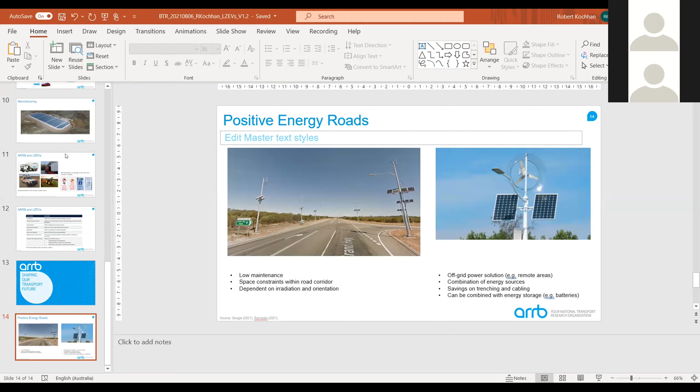Yes, we can see your screen. That's good. Let's start from the beginning. Okay, can you all see that? Yes, we can see that. Wonderful, thank you.

So I'm talking a bit about general background, what I've been working on, what we can work on as ARRB, what we have experienced in regards to low and zero emission vehicles or transport. This is a general overview, which gives you some ideas about what we need to look at when we talk about low and zero emission vehicles in general.

First, I want to start with the emissions created in Australia from different sectors. A large part of that is transport, shown in the middle brown column, and secondly electricity generation and distribution on the left, which is about a third of all emissions created in Australia. These two together play a large role in our overall emissions, and this is what we can tackle when we try to reduce emissions in the transport sector.

Of course, by using different types of vehicles with cleaner technologies, electric vehicles and hybrid vehicles, and also generating our electricity a bit less carbon intensive than we do at the moment.

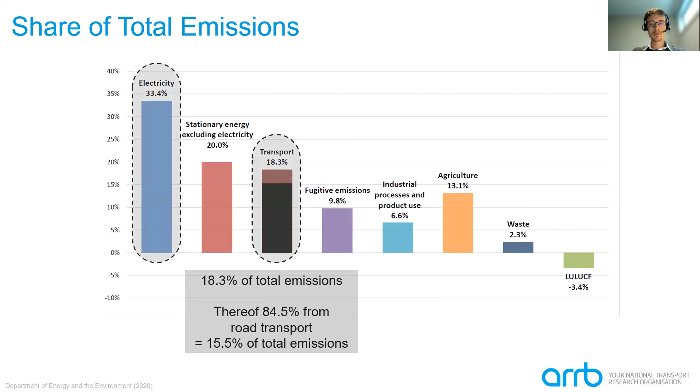If you look into greater detail in the transport sector, about 85% of all these transport emissions are created from road transport, and this is what ARRB focuses on for most of our work. The rest is rail, vessels, ships, airplanes, and so on, but most is from road transport, from the heavy vehicles and light vehicles we drive.

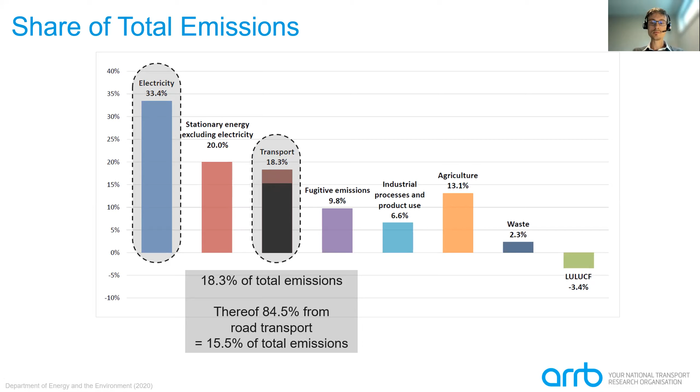In order to reduce these emissions, we can look at low and zero emission vehicles.

I've pulled up a figure from the International Energy Agency about the global electric vehicle outlook. We can see about 10 years ago, 2010-2011, we had next to no electric vehicles at all, and this has grown in the past 10 years to more than 7 million in 2019, possibly much higher already today, with an exponential increase.

Over the years, most of these vehicles are not in Australia, but in China, Europe, and the United States. Partly because Australia has a very small population compared to these other regions, but also because Australia doesn't have a lot of policy support for electric vehicle uptake. So we don't get enough vehicles for sale here in Australia at the moment, which has also contributed to that.

Just to note, BEV is the term for battery electric vehicle, so vehicles that only drive on electricity and can be recharged from a charging station or power point. PHEVs are plug-in hybrid electric vehicles, vehicles which have both a battery and usually a petrol engine, and can drive on either fossil fuels, petrol, or electricity.

In the next few slides, I want to go into the different options we have to look at in terms of energy and emissions reduction. These include both the use phase of the vehicle, when we drive it on the road, but also the phase where we assemble the vehicle and manufacture its parts.

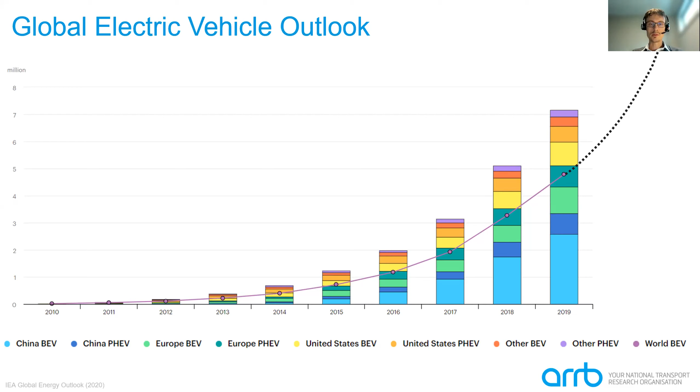That also contributes to the overall life cycle emissions of those vehicles. But before I go to that point, we need to, for the use phase, look again at the energy that we use to drive our cars with.

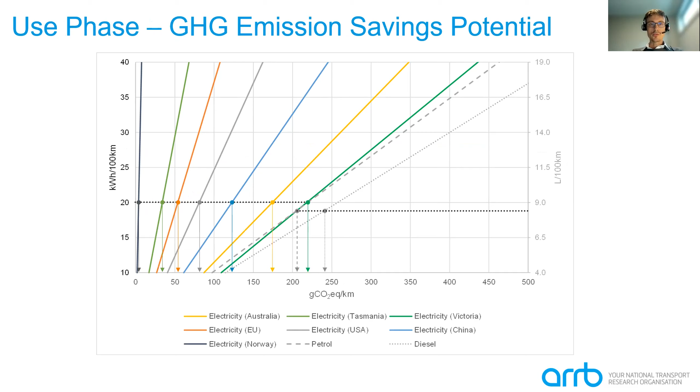So that was regarding the use phase when we drive the cars here in Australia. Of course, we also need to look at when we assemble and manufacture these cars and their components, because that also contributes to the life cycle emissions of these vehicles.

This is a generic overview of tracking the life cycle greenhouse gas emissions over the use phase of a car. Initially, when you compare battery electric vehicles to current fossil fuel driven vehicles, there is usually a higher amount of emissions generated during manufacturing, mainly because of new components such as the battery.

Over the life cycle of the car, as you use it and charge it with clean energy, you get out of that negative area in terms of this benefit for greenhouse gas emissions, and start saving emissions until you cross the zero line, and emissions become less eventually, after many tens of thousands of kilometers down the road.

There are different lines here for a battery electric vehicle with a small battery on a 200 kilometer range, or a larger battery, or even a hybrid electric vehicle, which has both a petrol engine and a battery in it.

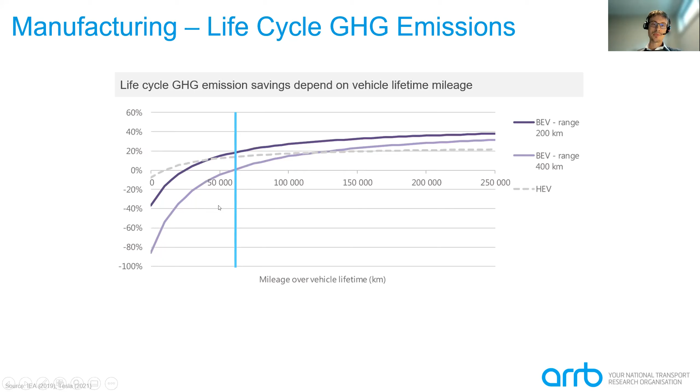The other thing I should mention is that if you have a private car, you may reach 50,000 kilometers only after 3 or 4 years of owning it, which means it takes a very long time to offset the initial disbenefit in terms of life cycle greenhouse gas emissions.

However, if you have fleet vehicles, such as a taxi or delivery vans, they drive a lot of kilometers every year, and you might reach that 50,000 kilometers after only half a year or so. This means it makes a lot of sense, for electric vehicles in general, to look at use cases with a high utilization rate, which allow us to really make use of the benefit of the electric vehicle creating less emissions during the use phase.

This is an indicator that the graph I showed earlier, where we start in negative territory in terms of emissions, is coming closer to the zero line in the future as we use more renewable energy to manufacture electric vehicles than we did in the past. Also, we scale up production, which makes it more efficient and less energy intensive per unit, per car or per battery.

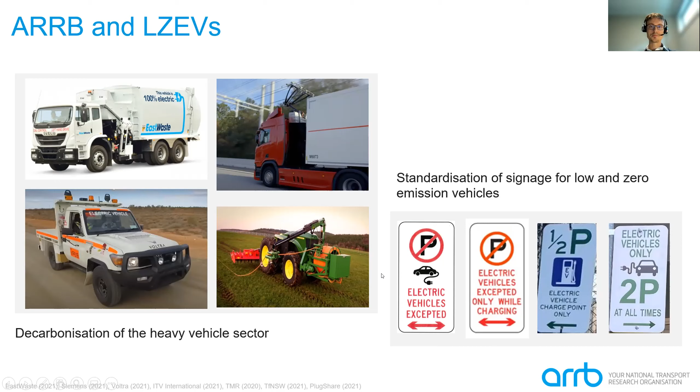Another project we were involved in is environmental impact parameter values. It's a bit of a different project looking at costs that result from road transport, from vehicles that we drive on our roads due to the fact that they create emissions, here in the greenhouse gas emissions categories. But there are also negative impacts in terms of costs for air pollution, noise pollution, and a lot of other things that we can quantify, to estimate the actual impact of our road transport in terms of emissions and costs.

Yeah, I think that's it from me. I'm happy to answer questions regarding all of that. Yes, we can go to the next person.

Thank you, Robert. It was very interesting for me, even though I'm at ARRB, but ARRB is really big. We have over 200 staff and different strategic working groups.

So it was even very informative for myself about what we are doing. There are actually two questions in the chat box from Professor Karl Kochhan, and I can read the questions, but Karl, please feel free to unmute yourself and ask directly if you want. But I can start reading the first one.

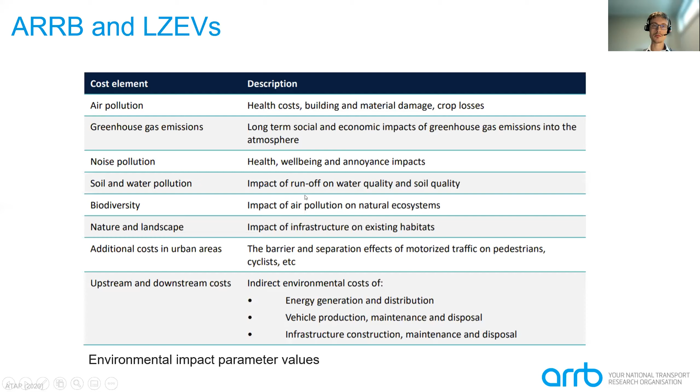Of course, there might be some variations as we progress. These figures are a few years old already, so Australia might have come down a little bit. But on average, if you look globally from the view of developed nations worldwide, Australia still has a very high share of fossil fuels in electricity generation—coal, oil, and gas. So we're not as good as the average of the EU or US, for example.

It's very interesting. So, for instance, even if we have a battery car, we think we are really on the green side, but still, because the electricity feedstock is not 100% renewable—sure, but even if you look at the relatively dirty energy we have in Australia, we still are able to save emissions from electric cars. And if you manage to reduce that in the future, or if you're a private car owner who plugs your car into your house which has solar on the roof, then you essentially don't create any emissions at all. It depends very much on the use case that you have.

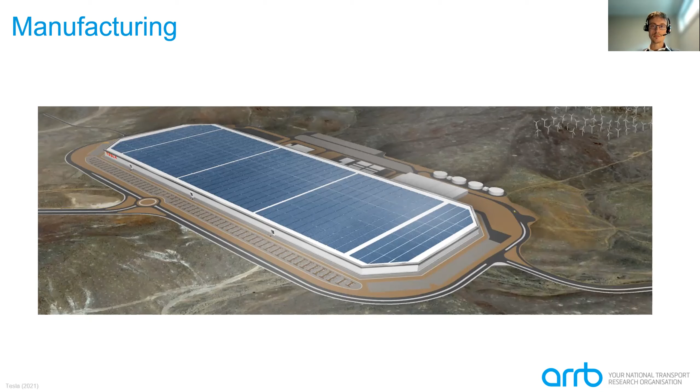So as we move towards a cleaner energy mix in general, and towards something like what's shown here, where entire factories are powered by renewable energy, these emissions per unit or per car come down a lot in the future. So what we're looking at here in terms of negative territory at the beginning of the vehicle's life is coming closer towards the zero line in the future, I guess. That's why I think we need to update some of the assumptions made in previous studies and publications around the manufacturing emissions of the vehicles.

Kendall, okay, he's happy and he thanks you. Okay, so if there's no more questions, then...

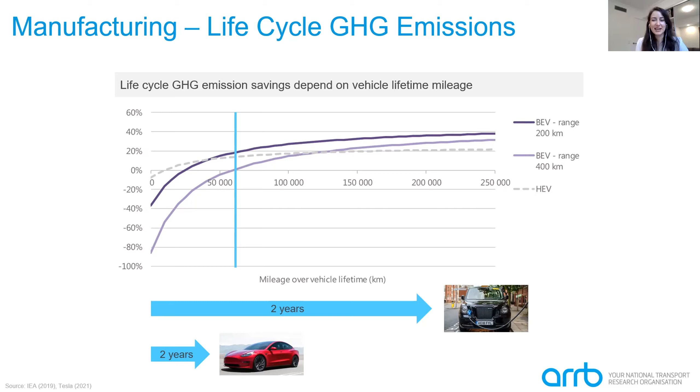Actually, I forgot to introduce you, Robert. Yeah, that's fine, do you want to do that? I can do it myself as well. Yes, let me just introduce Robert after he presented. I'm so sorry, I was between meetings and after that keynote speaker, I was kind of in a rush.

Dr. Robert Kochhan is a qualified engineer and also an economist, and the Transport Future Portfolio Leader at Australian Road Research Board. He has extensive knowledge and international experience working on battery electric vehicles and related future transport systems, as you also observed in this presentation. He has previously worked on future urban transportation projects and sustainable mobility solutions in Singapore and Germany, and has also been involved in solar electric vehicle design and development in the context of the Australian World Solar Challenge, where he participated as a member of a Brisbane-based solar car team. So he's our electric battery champion at Australian Road Research Board.

Let's say. Okay, thank you Robert for your presentation. No problems.

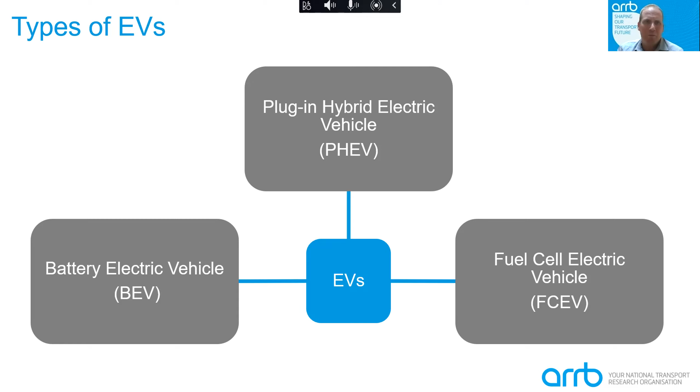As a side note, it's noted that hybrid vehicles with no plug-in features are excluded from the study. It's also noted that the definition of EVs is an evolving space. In the recent UK ban on internal combustion engines, coming into effect by 2035, this would also include PHEVs, the plug-in hybrid electric vehicles. In that instance, EVs are those vehicles which are purely EVs only and do not have an internal combustion engine at all. But for our project, we recognised those three categories as being the EVs.

So as a high-level overview, the project found that in order to support the transition to EVs, there would be actions that span across road operators' core and non-core functions. The core function relates to an area that road operators currently manage or are responsible for, and which requires different actions for EVs than for conventional vehicles.

A non-core function relates to an area that the road operator may not need to, but could act on to support the transition to EVs, either by removing barriers or providing active support, based on stakeholder expectations, other road operator examples, or taking a leadership position.

So as road operators undertake more actions associated with the non-core functions to support the transition to EVs, this is expected to increase the support in EVs as shown, and then this could result in an increasing uptake of EVs in the community.

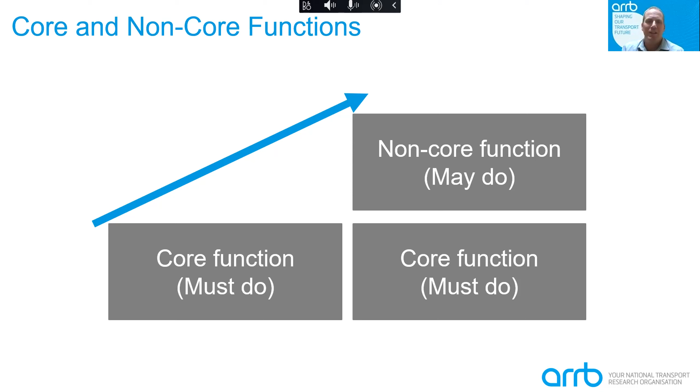Essentially through the investigation, 11 core issues were identified. These are issues that road operators must address in order to support the transition to EVs, because EVs are different to internal combustion engine vehicles and will have an impact on how road operators manage their road networks.

Of those 11 core issues, 4 were associated with registration and licensing. This includes inconsistencies in the classifications of EVs, considering expanding NEVDIS, which is an Australian concept for registering EVs across the Australian network to capture EV data, considering a unique identifier for electric and hydrogen vehicles, and investigating any license and mass concessions for light electric trucks.

And then 2 are associated with road access, including assessing hydrogen vehicle safety and access, and investigating payload concessions of electric heavy vehicles.

And then 5 were associated with EV charging infrastructure. This does not include the deployment of EV charger infrastructure, as that comes under the non-core ones, but essentially includes reviewing charging infrastructure public interactions, considering plugless charging and how that might evolve and impact on road management, reviewing service station standards, reviewing signage standards and guidelines for EV chargers, and considering sharing EV charger data to help plan for EV charger deployments and understand how much it's being used out on the road network.

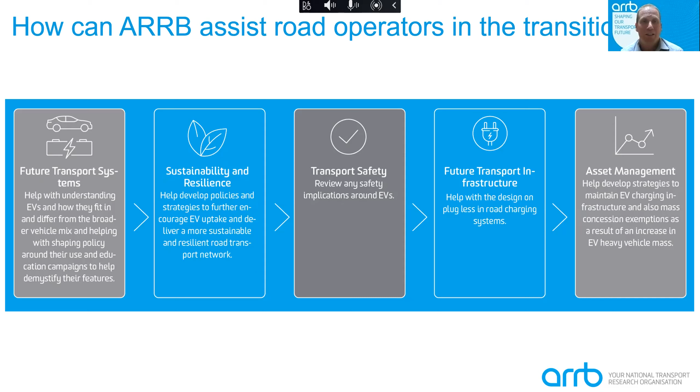I'm sure there are other aspects we can help with, but those are some of the key ones that immediately come to mind. Yeah, so that's essentially the end of my presentation today on this topic. Happy to take any questions or move on to the next one. Thanks.

Thank you, David. Is there any question? I don't see any question in the chat box. But yeah, like...

From what you presented, it's definitely very useful for the next presentation, which is actually mine, about hydrogen fuel cell vehicles. I believe we can adopt the same kind of strategy for the next one.

No worries. Okay. Okay, Kendall has a question.

Is plug-in charging likely to be viable? Is it likely to be viable, or plugless charging, are you saying? Oh yes, plugless, sorry. Well, I guess it's probably too early to tell.

But I think it's definitely got potential to help address some of those issues associated with EVs and the need to charge, plug in, find a charging point. But obviously there's the issue around having that installed in the road, and answering that question about it being viable, etc. So I think it's really just early days, and that's what we highlighted in the report.

So you can see now my screen, right? Yes. Thank you. Okay, let me just... sorry, I have too many slide decks. Actually, I can't see my...

Okay, yep, here you go. Now I can see that.

So I'm going to talk about hydrogen fuel cell heavy vehicles. It's not an externally funded project, but research we started studying here at ARRB since last year when I joined. It's one of the research agendas now at Australian Road Research Board. It's more about the literature review, but also our recommendations for some project opportunities that might be emerging.

So, hydrogen as a fuel. Hydrogen can be used as a fuel in transport, where fuel cell vehicles convert the hydrogen stored in cylinders, which you can see here in the vehicle, to electricity, using oxygen from the air in the fuel cell tank. The produced electricity is then used to drive an electric motor, shown here in this picture, and to recharge the electric battery.

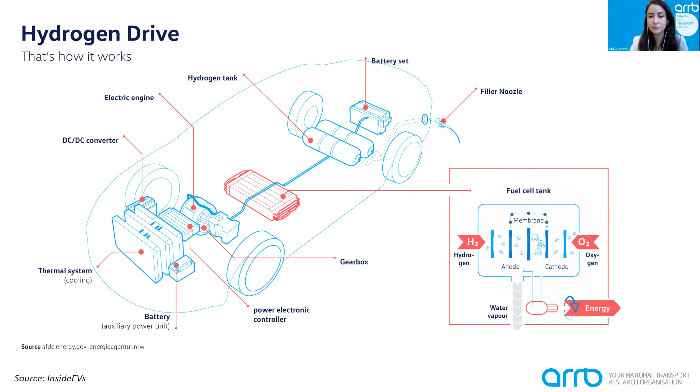But why FCV? Some argue that now that we have battery electric vehicles, hydrogen is more of a distraction. Battery electric vehicles exist as an option in competition with fuel cell vehicles. However, battery electric vehicles have limited operational capability in terms of heavy vehicles, including a lower distance range traveled and much higher recharging time, excessive size and weight of the battery, which reduces payload efficiency, and a higher material footprint due to the use of lithium batteries.

We know that in terms of heavy vehicles, particularly trucks, idling time is a very critical factor. So for recharging a truck that may take 7 or 8 hours, it might not be very ideal. And also the distance range with one time of charging is a factor.

The estimations indicate that refueling time of a heavy-duty fuel cell vehicle is about 3 to 8 minutes for regional delivery and 10 to 20 minutes for long-haul trips. This is based on a Department of Energy USA study from 2019. Whereas recharging time for the same size battery electric vehicle is estimated to be 8 hours, which requires idling the truck and allocating a designated charging area.

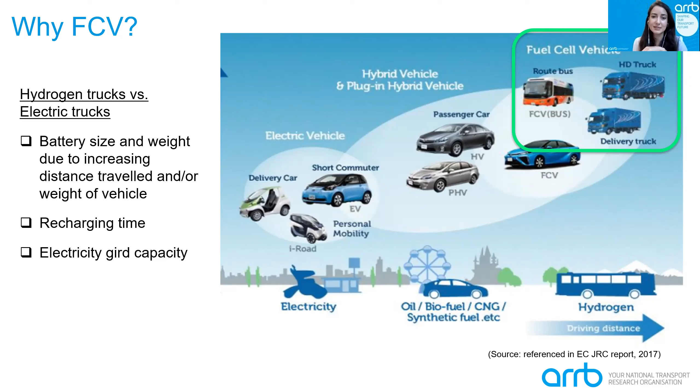EVs are efficient and cost-effective for lighter vehicles traveling relatively short distances. But when we go to higher distance of travel, or weight and power required, it really increases the battery size and weight, and in addition, as I said, it takes recharging time. So that's where the fuel cell heavy vehicle application could be useful.

The viability of hydrogen trucks has already been tested and established in a number of international markets. You can see here a few ports leading hydrogen trials, and also a few truck trials. There are actually heaps of them out there in China, Japan, and Europe. I've just mentioned a few of them.

However, it is yet to take hold in Australia. We don't have any hydrogen trial in heavy vehicles. We've recently heard some news that there are going to be 2 hydrogen fuel cell trucks in Port Kembla, New South Wales, and also 1 hydrogen bus in Perth for one of the mining companies, but we don't have any living testbed or trial yet in Australia.

So globally, the hydrogen economy is forecast to reach 155 billion in 2022, and many countries are investing in this technology's future potential as a fuel, energy store, and feedstock. In Australia, CSIRO estimates a potential for a $1.7 billion export industry and significant growth in domestic end user demand market by 2030.

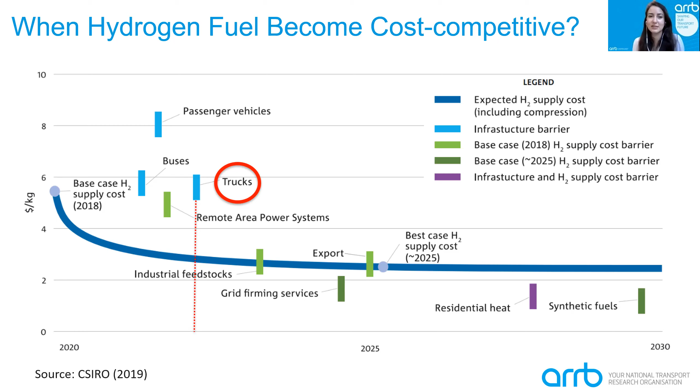So the reduction comes actually from the lower cost of hydrogen production, 30%, and 70% from the lower cost of retail distribution, driven by increasing station size and utilization.

So as the heavy-duty fuel cell vehicles reach the market, the freight transport industry needs information on the benefits, challenges, risk, and cost of ownership of these vehicles. Currently, these decisions must be made with little long-term field test history. There are just a few trials, as I mentioned, but not in Australia. And in general, fuel cell vehicles lack significant historical operational, maintenance, and cost data that would typically support investment decisions in transitioning the fleets.

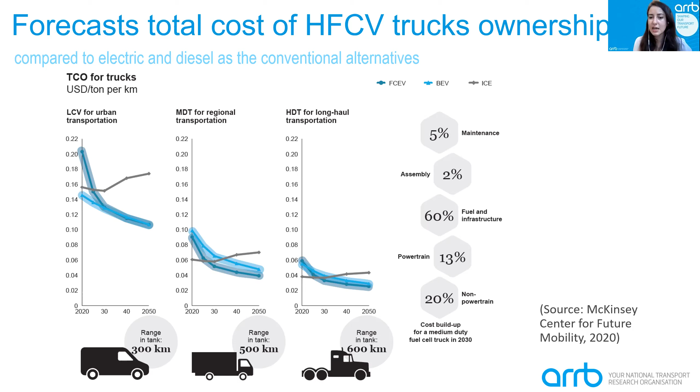So there exist a few unanswered questions and concerns regarding heavy vehicle fuel cell vehicles' effectiveness. For instance, what would be the effective distance range, reliability, fuel stability, and so on and so forth.

And regarding the reduction in price, hydrogen refueling infrastructure is the key enabler of this technology, but it's just like a chicken and egg problem. So how can we actually unlock decarbonization of heavy vehicles? It's an interconnection between supply and demand. The uptake of heavy-duty fuel cell vehicles is facilitated by easy access to the infrastructure and affordability of hydrogen fuel at the pump, where diesel and gasoline powered heavy vehicles take advantage of in-place fueling infrastructure. The lack of infrastructure on hydrogen might be a barrier.

So for instance, in Queensland, current hydrogen production occurs at industrial sites where gas, so-called blue hydrogen, or electricity, so-called green hydrogen, is used. Regarding a network of hydrogen refueling stations on the public road network, hydrogen should either be transported via trailer in a compressed or liquid form, or via existing gas pipeline. Actually, one of the advantages of hydrogen is that we can utilize the skills and also the existing gas pipeline to transport the hydrogen, and even the existing gas pump stations.

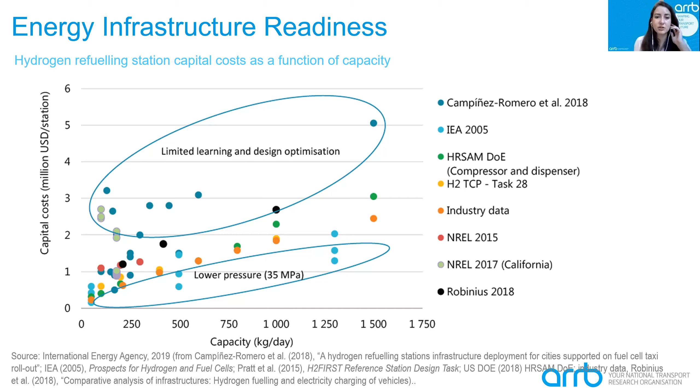Regarding hydrogen refueling stations, it has been advised by several organizations, for instance the European Commission or the Australian Trucking Association, that public financial support should be used to trigger significant private investments for these refueling stations. Here you can see the capital cost based on the capacity of these refueling stations, based on different trials that have been in place around the world.

When I mention unlocking decarbonization of the heavy vehicle transport sector, in terms of light vehicles and passenger cars, it's very easy to talk about, and with the policies and everything, because the market and model availabilities exist, it's really easy to move towards decarbonization by the targets.

But when we are talking about the heavy vehicle sector, we don't have any electric trucks. I mean, there are some electric truck trials, but they're not very common. So where the size and dimension of demand are unclear due to a lack of economies of scale and scope, the supply price of fleets and hydrogen fuel will also be much higher than diesel trucks.

On the other hand, the demand for hydrogen in the transport and logistics industry is overwhelmed by the lack of infrastructure, lack of calibrated total cost of ownership within the local context, for instance here in Australia and so many other countries, and also the higher price of hydrogen fuel on the supply side.

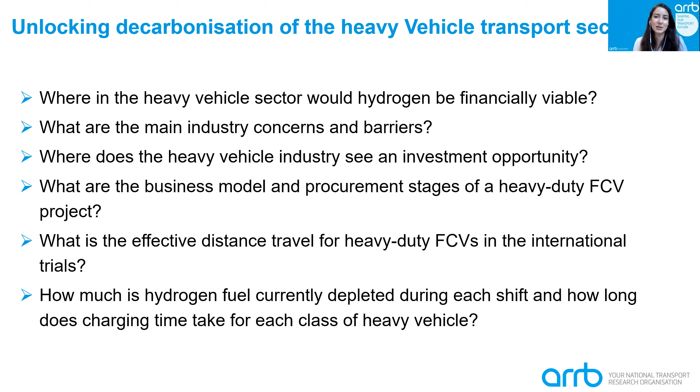With that, I've finished. Please contact me - here's my email address, and I'm happy to take any question.

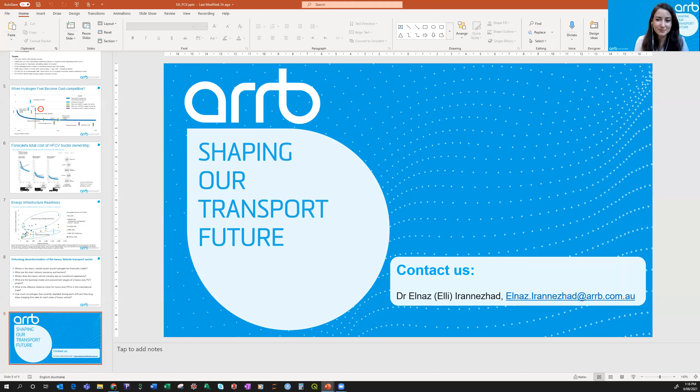So Elli, I raised my hand, my little virtual hand.

I hear from my friends in the energy sector that really the only way for the foreseeable future to get hydrogen is to use curtailed, or spilled, or excess renewables. Otherwise it's just way too expensive and it's not carbon saving. So is that how you think Australia will be doing it?

Yes, that's correct. We believe that kind of a transition should happen, so even with some gas resources that we have, we don't think we necessarily should now encourage everyone to use green hydrogen as a feedstock, because of the price - as you mentioned, it's not cost competitive. But if we just wait and see if it's going to be cost competitive in the next 5 or 10 years, then we will lose that race for decarbonizing the heavy vehicle industry.

So it might even be good to start with blue hydrogen, or even gray hydrogen, and then move towards blue hydrogen and then green, rather than just waiting and doing nothing, because at the moment the heavy vehicle sector is just dominated by diesel trucks.

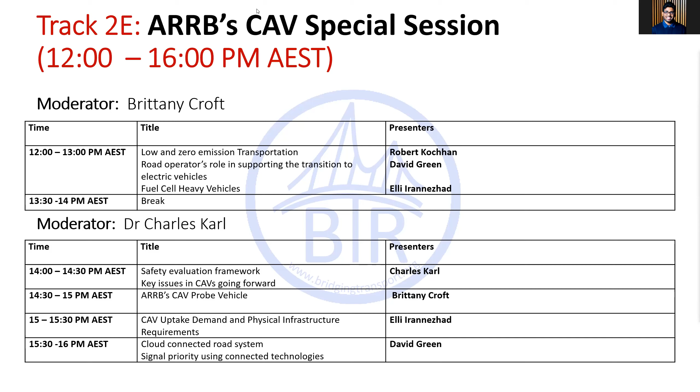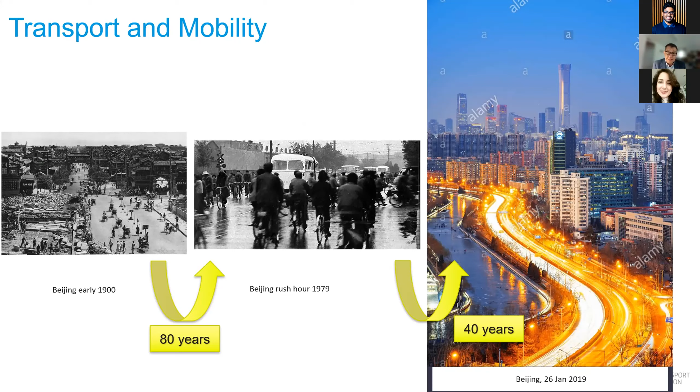In this first presentation, I managed to combine two presentations. The first, of course, is how is all of this going to operate safely? Because until we transition to cars with no steering wheels and so on, we are going to have an environment where we still have the horse and carriage in some of our cities, and we will have all the normal cars that people will drive - young people, old people - and we will have all of these wonderful e-scooters, e-bikes, and autonomous shuttles and so forth. So how is all of that going to work safely?

This timeline that I mapped - in fact, I think we are in that period now - because we have a very prescriptive regulatory and operational environment. Remember, all of you have got a driving license. And then if you buy a car, you've got to pay registration, and then your car can go on the road. Otherwise you'll be fined and the car will be towed away. So we have driver's licensing and you register your car. And then wherever you drive, even if you drive on a university campus, you have to follow the rules in the campus, or on a local street, or on the motorway and so on.

So it's very prescriptive. But when we talk about cars with no steering wheels and so on, autonomy and so on, we are transitioning. If you think of those operations today, how do they manage to operate? Well, the proponent goes to the road agencies or the government and says, 'Hey minister, can you give me an exemption?' And do you think the minister will just say yes based on that? No, he wants to see a lot of information, and then he will have his people study the case and say, okay, if you follow all of those things that you say you will do, then I will let you operate on my university campus, or on my high street, or on my motorways.

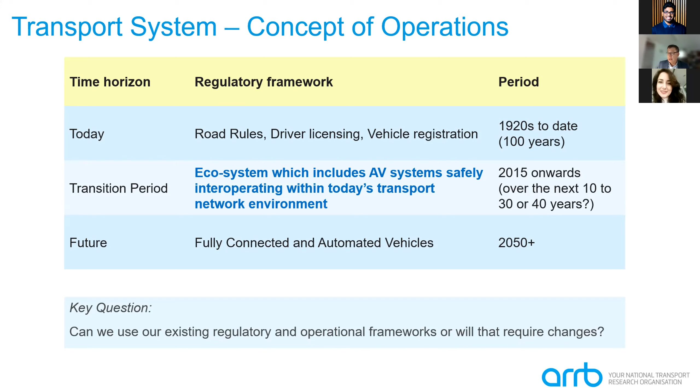The most important thing to remember is that we can have vehicles coming from all over the world, but in order for it to work in our jurisdiction, it depends very much on the infrastructure we have. Like hydrogen vehicles and electric vehicles - no infrastructure, how can you operate? The other part is about people. People need to understand how to work with the technology and the infrastructure, not just the owners of those vehicles, but all the other network users - the pedestrians, the cyclists, the trucks and the cars and the buses.

And the fourth part of the system is our regulation and our operational frameworks. You can think of laws like the ones for lockdowns and COVID, but to actually operate them successfully, there's a lot of non-compliance, and people with language difficulties don't understand and cannot do those things. So you can come up with laws, but if you don't have those operational frameworks in place, it doesn't work. The best laws cannot work. So when we talk about a transport system, those four elements really have to work together. And what works in another country, we can import 80%, but the remaining 20% is where we need to customize for local people, local environments.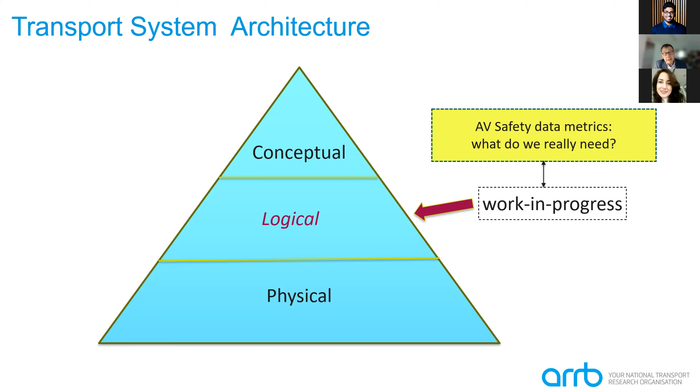We haven't worked it out yet. We are beginning to, in the exemptions that jurisdictions are providing, but we are on that journey.

Now, I like to use this example from Singapore because if you look at the boxes that I have not colored, those are the things that come from the vendors and the vehicle. So the vehicle comes in with a system safety, an active system safety, and a safety of the intended function - SOTIF. Those are ISO standards, and the vehicle and vendor have tested them out. But the thing they haven't done is basically validate that in the local environment, be it George Street in Sydney or Bourke Street in Melbourne or any other road in your jurisdiction. Of course it works on the test track, and it works in the countries where those manufacturers originate from. But will it work in our environments? We don't know.

And the other circle that I drew around was Singapore. Our colleagues in Singapore said, will it work in the Singapore environment? And where will it work in Singapore? So those are the things really that ARRB is interested in, and all of us would be interested in, because I guess we are not manufacturing vehicles in Australia.

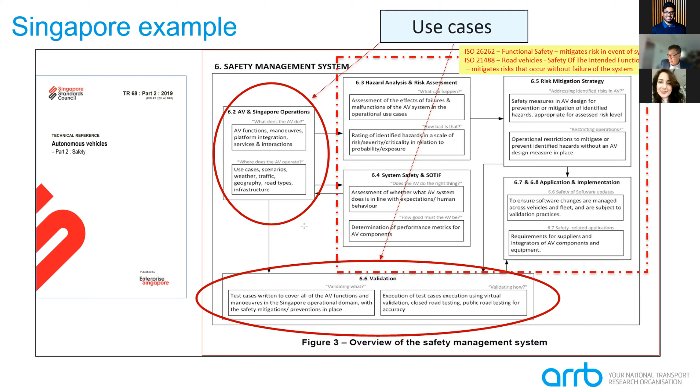But in order for those vehicles to work, for us to benefit from safety, from productivity, from emissions and so on, we need to be ready. So why have a safety management plan? It's because what we are trying to do is different from what we already have on the network. We have to think about this combination of technology, infrastructure and systems. How is this going to work? So organizations develop their idea about how it's going to work safely, and they present it to the jurisdictions, and the jurisdictions approve.

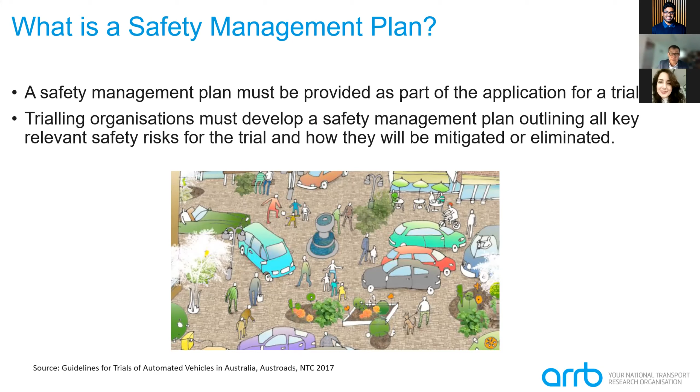What does this mean? What does this look like? This is my final slide. We have done many of these in Australia in order to stand up trials and demonstrations. At a high level, it talks about the project, the technology, how safety will be addressed, and what sort of traffic management plan will be in place - meaning we are going to close the road down and no one else is going to travel on it. So it's going to be very safe, Mr. Minister, we can operate it.

Or, we are going to operate it in peak flow traffic. How are we going to do that? Well, we're going to have an escort. We're going to tell all the drivers we're going to drop the speeds. Will that happen? And incident management. Then there are other approvals, of course, compliance, insurances, and so forth. And then all sorts of other information about who is actually going to be the driver and so on. So these elements at a very high level comprise the suite of documents that have been prepared and will be prepared.

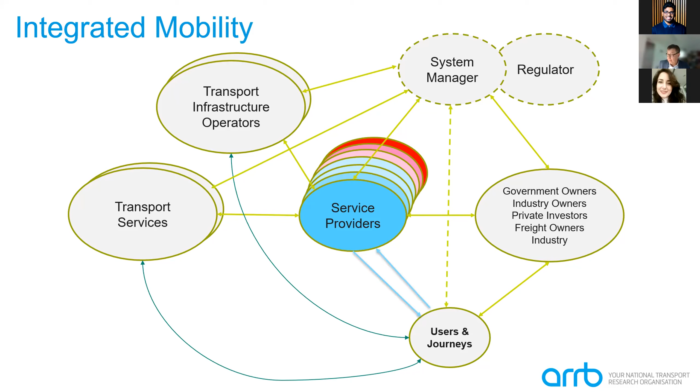Now, remember earlier I talked about the logical architecture, and when David presented in the earlier session, he talked about road operations—the things road operators should be concerned about when we have automated vehicles on the network. He talked about some of the core functions, the core areas road operators should be concerned about. This is something similar.

If you operate the network and you are going to this future environment, what are the core areas you need to be concerned about and have ready so that you can support these multiple service providers, with multiple vehicle options, with multiple infrastructure options? They are, of course: standards, interoperability, security, safety assessment, precise positioning, communications, the digitization of our traffic regulations, real-time management, and last but not least, a safety assurance regulator—just like in aviation, where you can operate all sorts of aircraft, but there is an assurance agency.

So I guess I'll close my presentation by saying, what areas do we have under development, and what are the missing links. So with who's in control in Australia, we talk about an entity being created in law called the Automated Driving System Entity.

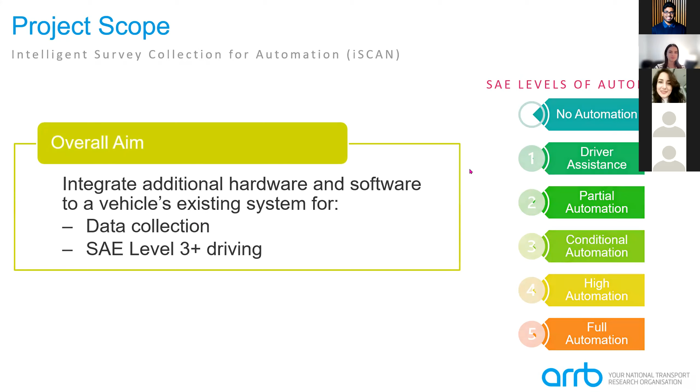This is kind of 3 stages - again, trying to make everything very basic to understand. While the 5 stages before were the official stages on paper for the first year, this is the project phases for the entire life of the car, starting with installing the extra technology all the way up to making it work to increase the car's automation. So once we've decided on the software and hardware, we're going to install it into the car and make sure it integrates with the car system and with each other.

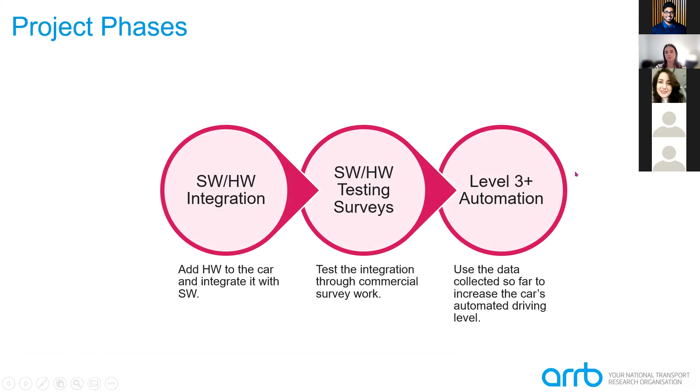Then after that we've obviously got to test. Because all of the equipment we're installing collects data, we're hoping that data can then, say, get commercial survey work and provide that data to clients like local governments, adding on to the fleet of survey vehicles that ARRB already has. Through doing all this testing and collecting all this data, we can then use that to increase the automation of the vehicle to get it to that level 3 and beyond.

The official objective is to establish a new automated probe vehicle as a test bed to enable applied research by ARRB into the deployment of CAVs in Australia by identifying different gaps. There's quite a few gaps already that we've identified, as you can see on the right-hand side, I won't read them all out. But through all the data we'll collect, and actually having a proper CAV running around that ARRB has access to, we're hoping we can find out not only the gaps in the vehicle market and the vehicle itself, but also the infrastructure.

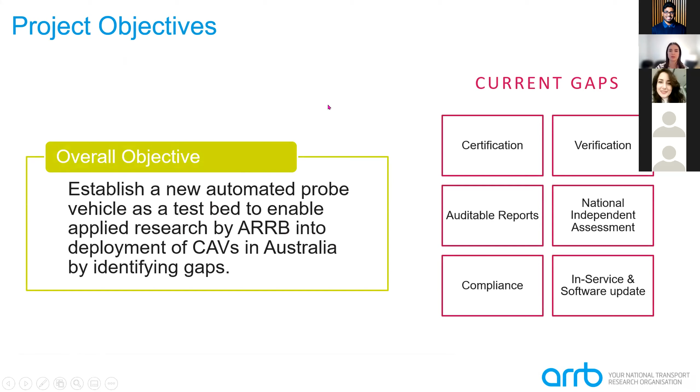That's going to be important because, as we know, a lot of the vehicles currently on the market with some form of automation level 1, 2, whatever, are made overseas. Australia is quite different, so we've got to make sure our infrastructure allows us to access some of the higher technology that overseas cars have, that sometimes we miss out on because our infrastructure is a little different.

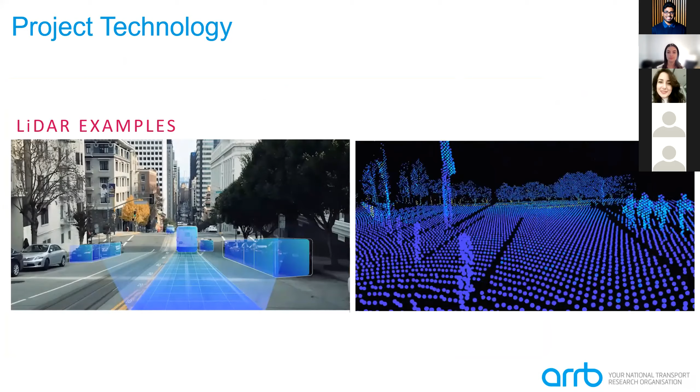And just finish the presentation with some more shots of what it would look like. So the finished product should look pretty much like this, but with some added gadgets on the side, LiDAR, radar, cameras, that sort of thing. So it'll be a bit chunkier, but hopefully look very similar to this.

Thank you, Brittany, for a very nice presentation. In fact, you're very lucky to have an A team here. Brittany, Francis, the initiative actually started by Dickson and Leow, who unfortunately left ARRB to start another exciting career. But anyhow, I hope the project keeps going.

We were cautious about not leaving too much information because that's an iMove project, and we are cautious that it has to be first announced by iMove and ARRB. It's actually an internally funded project, so we don't have an industry partner for this project. The industry partner is also ARRB, but with the help of iMove.

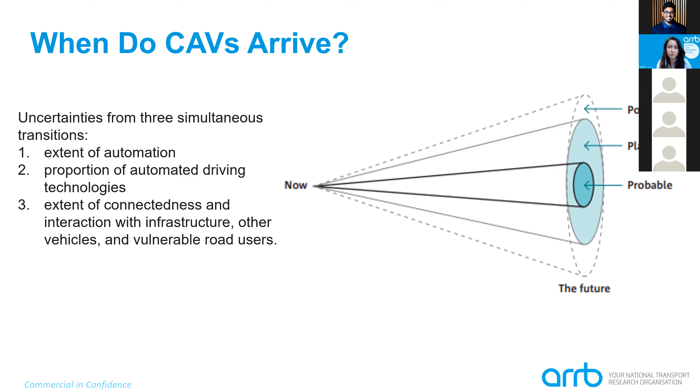Now, in the figure on the right hand side, you can see that I have indicated probable, possible, and plausible future. So the forecast that we did for the uptake demand is more on the plausible future, because of all of these uncertainties.

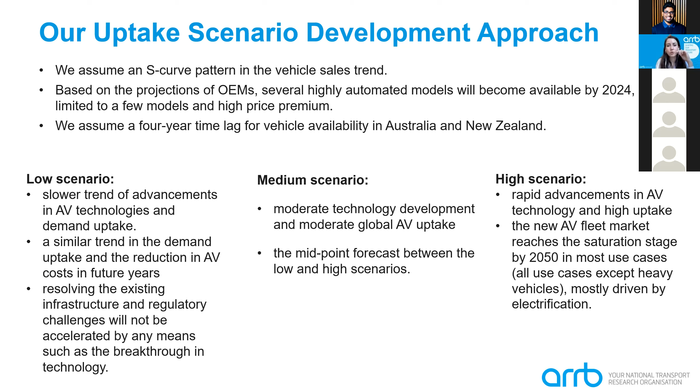In this way, when we have both low and high scenarios, we can undertake sensitivity tests. For example, if the uptake were very rapid, accelerated by electrification or interventions or a breakthrough in sensing technology, we would be able to see what that would mean for different investment and infrastructure requirements.

So the market expansion in terms of new vehicle sales is expected to continue significantly from 2030 onwards. The medium scenario assumes that passenger vehicles and robot taxis equipped with advanced driver support systems, like level 1 and level 2, have already hit the market.

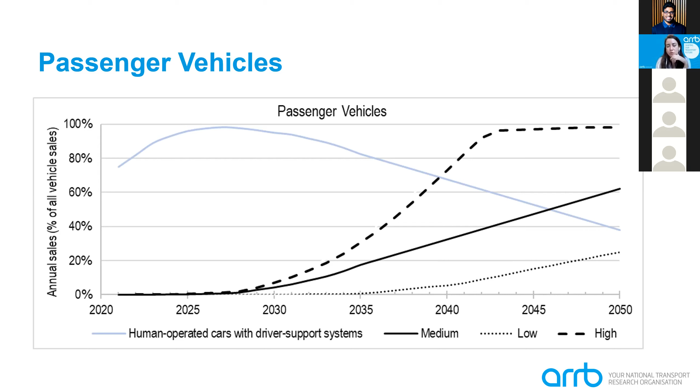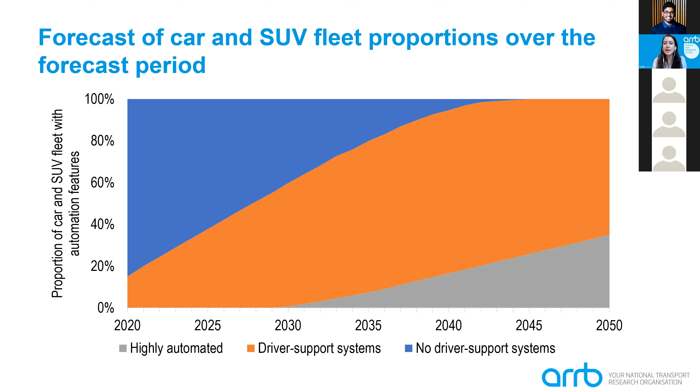This figure presents the plausible timeline of the market penetration of passenger vehicles. In the previous slide was the new sales, whereas this one is the market penetration. We forecast the market penetration based upon the new fleet sale rates presented in the previous slide, the annual market growth, which is a constant rate per capita based on ABS, Australian Bureau of Statistics forecast of low, medium, and high population growth, and an average lifetime of 10 years of passenger vehicles.

Based on the analysis of supporting evidence gathered from expert consultation, the Austroads reports, and historical motor vehicle sales, we expect that wide-scale availability of driver support systems, or so-called ADAS, level 1 and level 2, will occur sometime between 2025 and 2035. And the deployment of highly automated vehicles, level 3 plus, with a dominant share of level 4 vehicles, will occur between 2035 and 2050. So that's about the AV uptake demand.

I'm going to talk about infrastructure enablers, but I can answer some questions if you have.

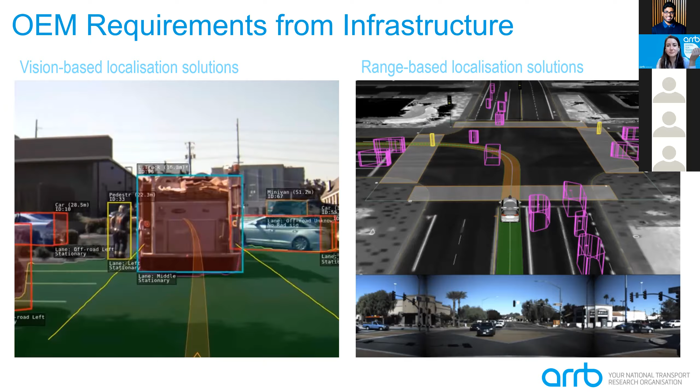The approach consisted of three processing methods: machine vision post-processing of road surveys, manual rating of road surveys as validation, and real-time processing to simulate CAV operation. They audited 25,000 kilometers using network survey vehicles, using existing and new video imagery, plus an additional 1,000 kilometers of priority roads using real-time data collection.

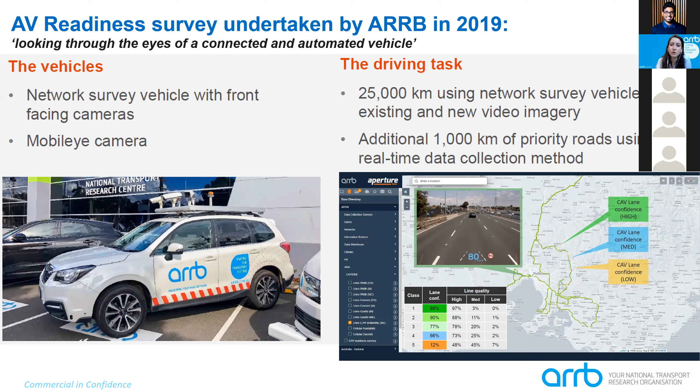The findings have been published in the report Infrastructure Changes to Support Automated Vehicles on Rural and Metropolitan Highways and Freeways, and it is publicly available for everyone to download and read. The major findings - I won't go through all of them here - but it looks like that in Australia, freeways and

highways typically are ready at least 90% of the time for the operation of at least level 2 automation. Cellular availability also is typically high, and it looks like the width of the line marking is likely to be less important than the overall contrast between the line and pavement.

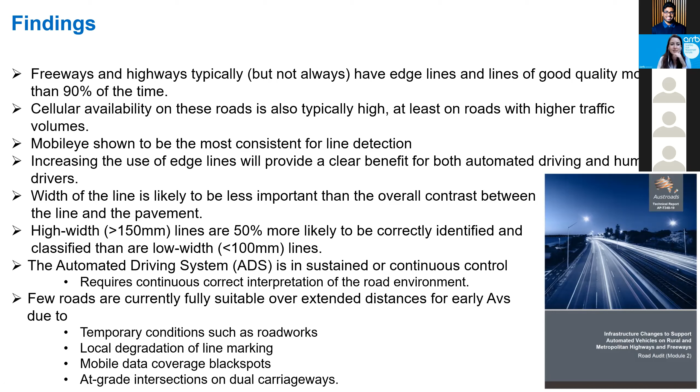This result is very interesting because there are other studies that focused on the line marking width, saying it should certainly be 150 millimeters, whereas it looks like the contrast ratio is far more important from the machine vision perspective.

That study really helped us in understanding the physical infrastructure requirements for CAVs. In the short term, we see that AV readable line marking, a harmonized approach of road signage, and work zone signage, and treating ghost line marking,

are important infrastructure requirements for the operation of CAVs on all road types. For motorways and highways, ramp line marking is confusing for automated vehicles. This is a finding of several trials and studies, and also the placement of the ramp and mainline signage

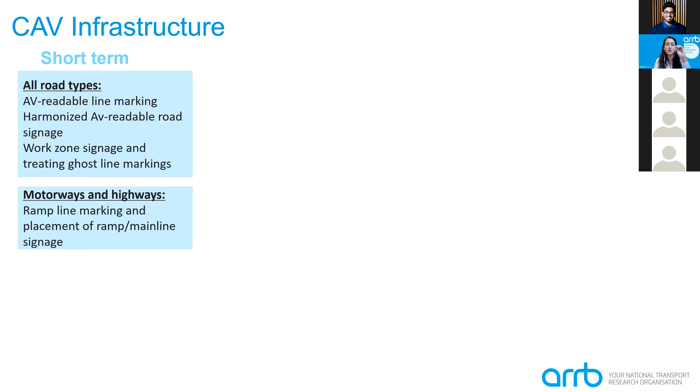is sometimes confusing for automated driving - they mistakenly read the sign installed on the ramp, not the main line, or the other way around. On urban arterial roads, we need to invest in CAV compatible traffic signals in terms of placement, and also in terms of the AV readability of the traffic lights.

When I say CAV compatible, it means having roadside units and connectivity to vehicles, because trials, one after another, show that when the placement of the traffic lights is blocked by other vehicles, trees, or something else, it would be a very risky situation for automated cars.

Also school zone signage, which has different standards across different states, is one of the other critical issues. In rural highways, however, because in Australia we have so many unsealed outback roads and rural highways, it looks like it's impossible to have pavement line marking, or even pavement in the first place, let

alone edge line marking on those. In that case, providing contrast ratio of the road surface would be important for AVs. These are the short-term infrastructure requirements.

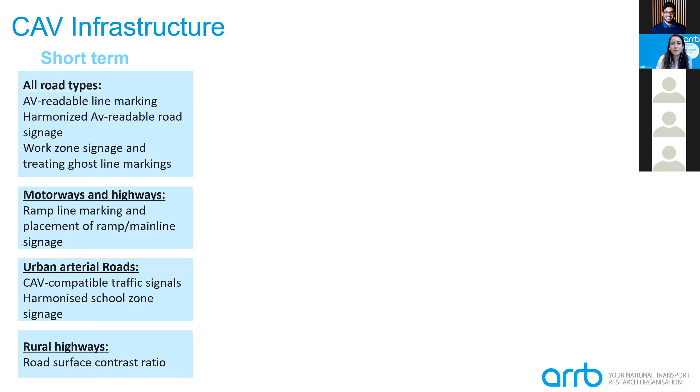In the short/medium term, we see that some new infrastructure would be required. For instance, safe stopping areas on motorways and highways, and managing transitional points between highways and arterial roads. We now have some abrupt transitions that are very challenging, so for automated driving technologies, there should be connectivity or proper signage installed in those transitional areas.

On urban arterial roads, we're going to need CAV pickup and delivery areas for robotaxis, for robo shuttles, and also for robo-commercial vehicles. Kerb and walkway management for footpath delivery vehicles is also another challenging area that has been found by several trials.

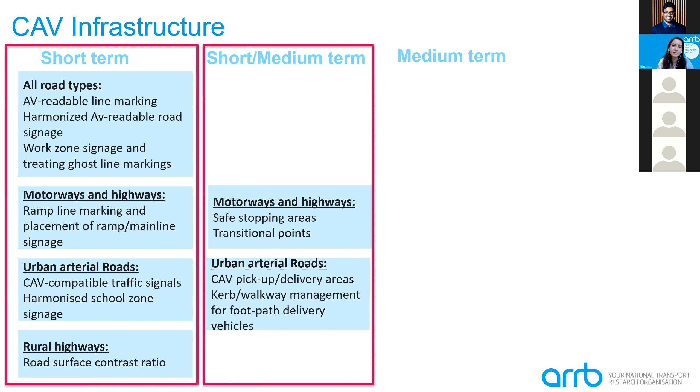In the medium term, we might need to look into AV-specific bridge designs and AV-specific pavement designs. For bridge design, because of platooning, it hasn't traditionally been factored in - we haven't looked into the impact of platooning vehicles with a low gap interval between them. And in terms of pavement, if AVs operate the same trajectory in terms of lateral positioning within the lane, that's going to be another challenge.

Although we have seen from some AV developers that they're introducing stochastic distributions for the lane keep assistance system, so there will be a bit of distribution rather than traveling on the same trajectory. Also in the bridge design, as I mentioned, the platooning, we've seen that new sensors enable a longer leader-follower model, so we may not need any improvement in that aspect.

In the urban arterial roads, we may need semi-transit dedicated lanes, and intentionally excluded the dedicated lane for passenger AV vehicles, because based on consultations and our observations in ARRB, it looks like even OEMs are not in favor of that, and it has lots of equity issues. However, it could be one of the areas for transit dedicated lanes.

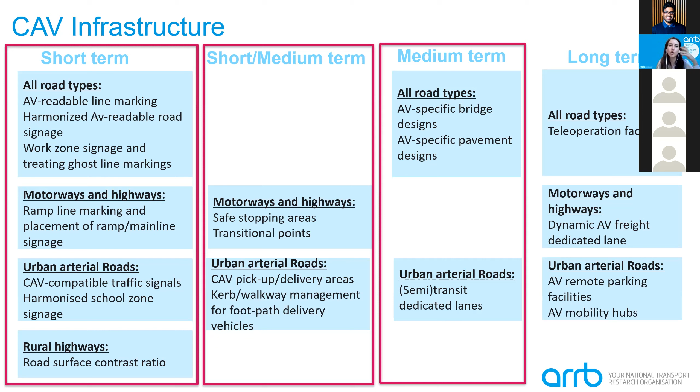And some new infrastructure that is foreseen to be required on urban arterial roads is AV remote parking facilities and AV mobility hubs, because if we don't have any driver, then it is believed that car ownership would shift towards more using ride sharing and AV ride sharing rather than owning an automated vehicle.

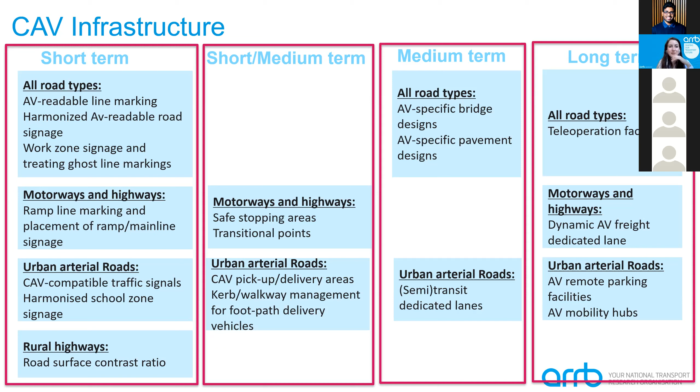So we have now 4 classes, and I put these boxes because there's actually separation between them. If you look at the first column here, these are the existing infrastructures that would benefit both human drivers as well as automated driving, so the benefit would be for the whole population.

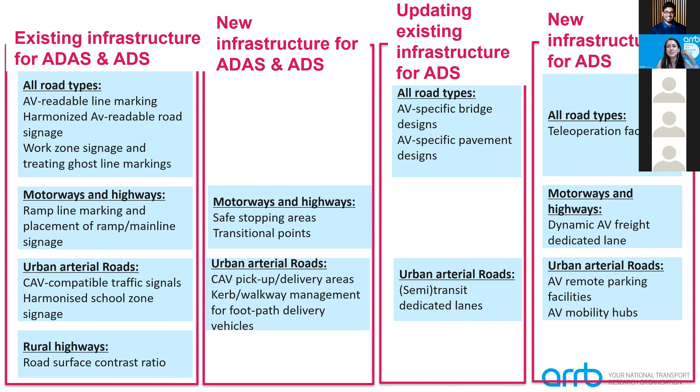The second column are in fact new infrastructures that again would benefit both systems. The third column would be updating or upgrading the existing infrastructure that would benefit only automated vehicles. And the last column would be new infrastructure that again would just benefit automated vehicles.

So I have just 2 slides in terms of high definition maps. High definition maps, as I mentioned, are part of the infrastructure to support AV deployment. Some of the consultants indicated that HD maps are seen as a must for the road agencies and OEMs. There are various definitions of high definition maps used by different industries, and also different standards.

So it is important to harmonize these standards around high definition maps. We also know that maintaining and developing high definition maps is a very ongoing, expensive exercise, and the government needs a good monetizing business case for developing the high definition maps. However, it is believed that it's an asset.

So now we look at the physical roads as an asset, but as we move towards that future where automated vehicles will dominate the transport system, then we might not actually need traffic signals or even traffic signs or line markings, as long as we have very well established and very good high definition maps. So it could be considered as an asset that some believe road agencies now should invest in.

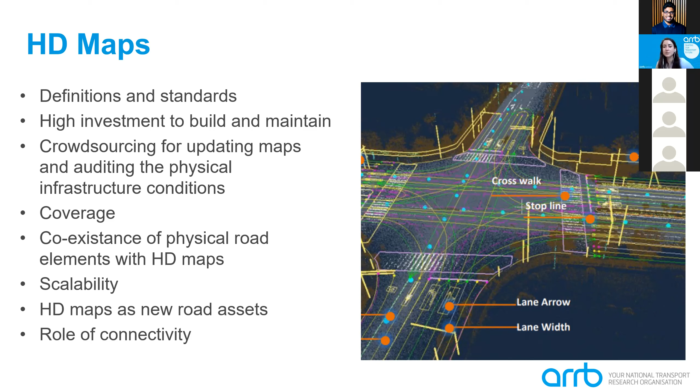The last item is scalability, which is important, and the commercial justification for providing this still doesn't exist. Also, the role of connectivity: for reliance on HD maps instead of physical infrastructure, an accuracy of at least 1 or 2 centimeters for vehicle positioning is required, so the role of connectivity becomes highlighted, where roadside units, either virtual or on-site, would definitely be required.

So that's my last slide, about vehicle to X connectivity, which could be V2I or V2V, vehicle to infrastructure, or vehicle to vehicle.

As I mentioned, traffic signs are expected to be equipped with digital infrastructure to vehicle communication. This would resolve the obscuration of traffic signs that has been challenging for CAV trials, and also lack of visibility in bad weather like heavy rain. Communication would be particularly beneficial where there are two traffic signs very close to each other, for instance on parallel roads, which is very confusing to machine vision.

Providing connectivity, or at least cellular availability, in tunnels, particularly long tunnels - for instance, the ones in Sydney WestConnex in New South Wales, which actually also has a signal - is going to be critical.

V2V communication, vehicle to vehicle communication, also becomes very critical for emergency and regulatory vehicles, and vulnerable road users, because when we just rely on vehicles for providing safety of vulnerable road users, bicycles and pedestrians, V2X connectivity would be highly critical.

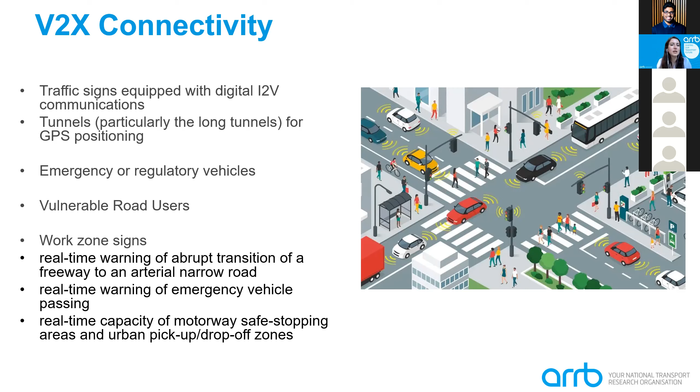So with that, I'm done. As I mentioned, these are just the partial findings of our project that I'm happy to have shared with you. Please search for the final report once it's publicly available, and I'm happy to answer any questions if there are any.

Okay, so we have one question from Ross: would real-time crowdsourced data provision, provided by firms like Mobileye, remove the need for specific ARRB road agency data collection vehicles in the medium time period?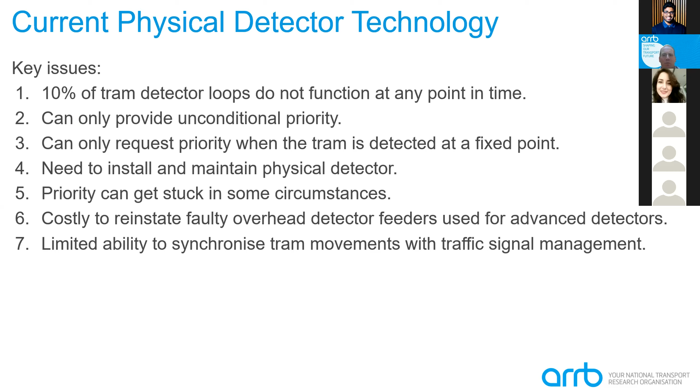Through exploring the use of communication technology to deliver tram signal priority, the trial aimed to see whether this could be done in a smarter and more efficient manner compared to the current physical detector-based system. We looked at 12 technologies and ended up selecting two: Transnet, and cooperative ITS or C-ITS with 5.9 dedicated short-range communications.

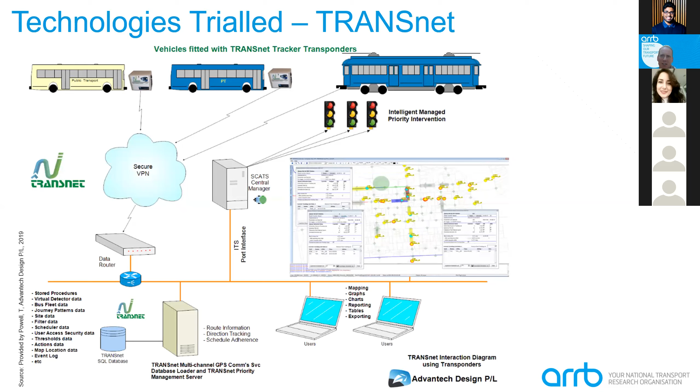So the Transnet technology was developed by Advantech Design and monitors the tram position based on global navigation satellite systems, or GNSS technology, and it requests SCATS priority actions to be undertaken as determined by the signal operator, utilizing cellular communications as the means of communication. So that's considered a top-down solution.

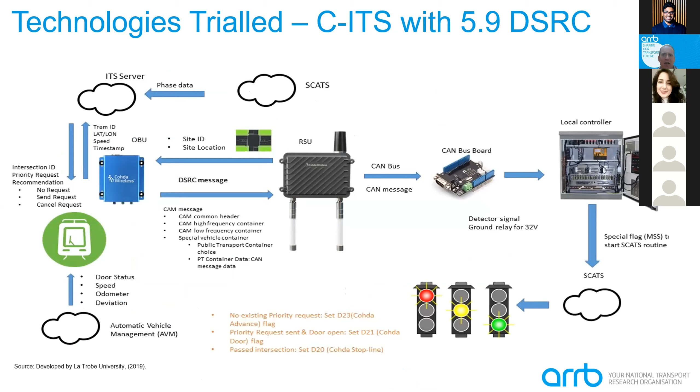And then we have C-ITS with 5.9 DSRC technology, which was a bespoke solution developed by La Trobe University. It monitors the tram position based on GNSS technology, obtains local inputs with respect to the SCATS signal phasing and tram door status, and can issue and cancel C-ITS priority requests based on the tram door status. It utilized local DSRC communications as its means of communicating, so it was more of a bottom-up solution. We did the trial along a segment of Tram Route 75.

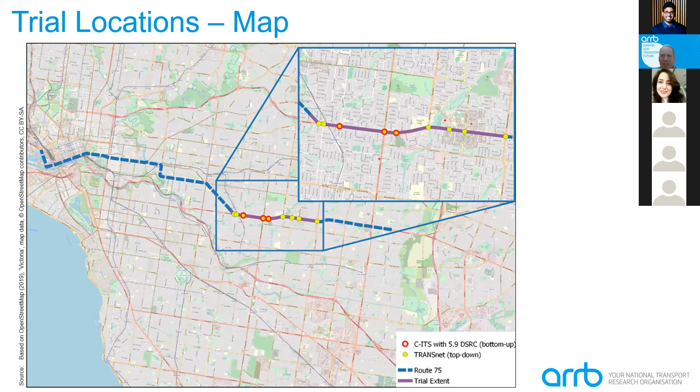Some of you might not be familiar unless you're local, so that's shown on this slide here. The Transnet technology was operated at 6 signalised intersections, and the cooperative ITS with 5.9 DSRC was operated at 3 sites within the segment.

It was really, I guess, a proof of concept project - proof of concept of whether the technologies could be used to deliver tram signal priority based on tram travel timetable adherence, then issuing or requesting priority and having that priority action based regardless of the tram timetable, to see whether it could actually deliver faster tram travel times.

The project explored whether communication-based technologies could be interfaced with the tram and the signal infrastructure, exploring this in a real world as opposed to laboratory environment. So it's pretty critical - this included real and operating trams, real and operating existing signal infrastructure, existing pits, conduit, poles, and signal cabinets. It was really kind of going out, getting the hands dirty to see if this technology could actually be implemented and work in a real world scenario.

But it wasn't intended to be a business case - it was really just a proof of concept to see whether this could work. As a result, it did provide some really good findings and lessons with respect to delivering signal priority, not only for trams, but those lessons could then be applied to other priority vehicles.